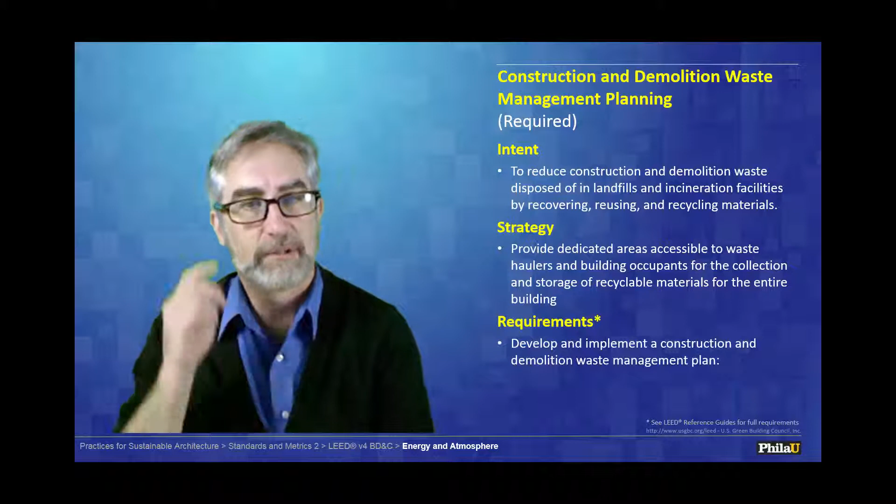Now everybody is doing construction waste recycling, and we found that there's money to be made here. It's not just about saving the environment; all of those materials that are thrown out on site actually have financial value. And so what you want to do here is work with your haulers and work with your subcontractors to implement and develop a system by which people can effectively recycle on site. Multiple languages as a strategy, by the way, is very useful. And these plans need to, of course, be followed up with performance that we'll talk about later.

This is one of the most exciting parts of the new LEED V4 for me, I think, and it shows that the people at USGBC and GBCI listen. And so the intent here, of course, is to encourage adaptive reuse. Why build new when we have lots of empty structures here in the world? Why not just renovate and restore and capture that embodied energy? So the strategy here is close that loop, to try to have closed loop systems where we're not having lots of energy flying out into the environment.

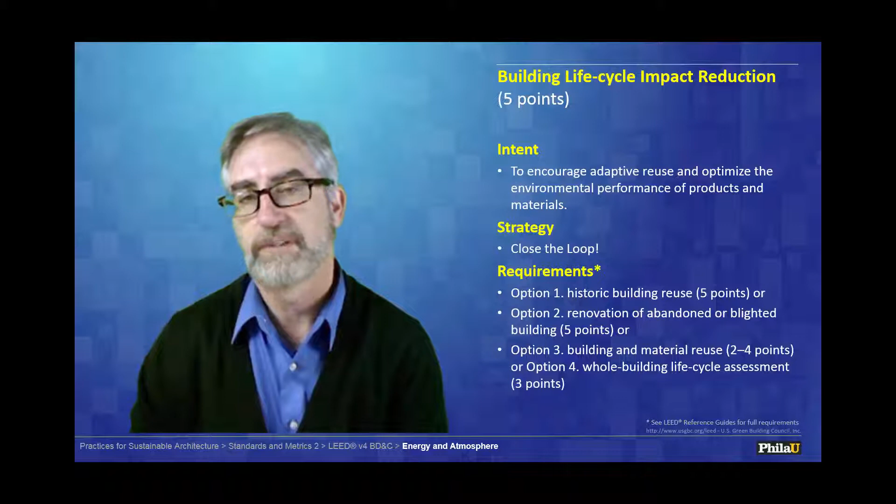And so, for example, here, 5 points for historic building reuse. I think this is just phenomenal because it hits not only the quantitative, but it starts to understand the qualitative aspects of a historic structure having value, having intrinsic cultural value. And so LEED is beginning to acknowledge that. We can also renovate abandoned or blighted structures, and we can also look at saving parts of buildings. And so what LEED has done in version 4 is really evolve the whole materials and resources category to be more responsive to what's actually happening out in the marketplace.

And then the other big thing that's happening is LEED, along with Living Building Challenge and other systems, is driving accountability in product manufacturers and making them become more transparent, more open source, having them report. So the trick there, though, of course, is it takes a lot of time on the sustainable designer's part to get with those companies to have them report out through their declarations. It is extremely time consuming. The only upside, of course, is that once you've got the information, you have it for future products, for future projects. So that's pretty important.

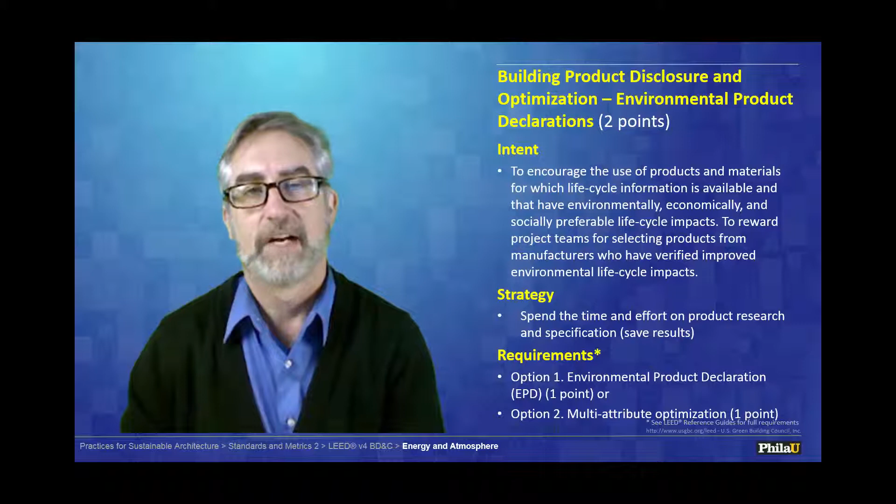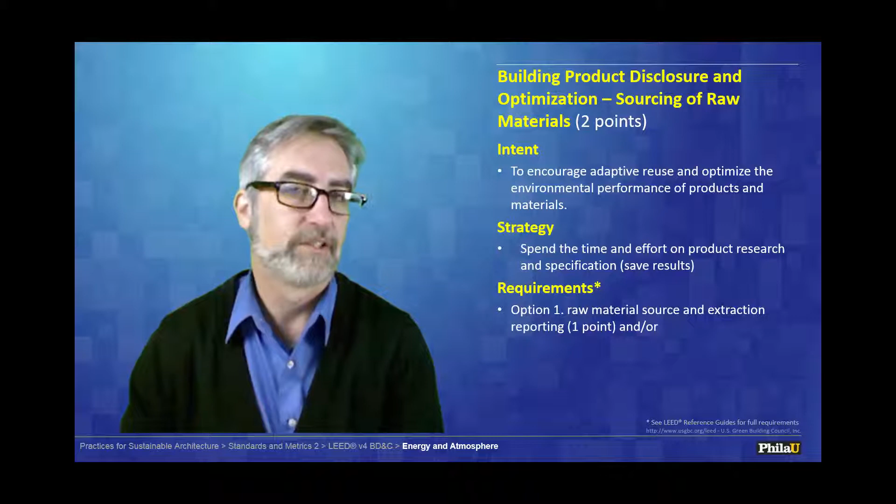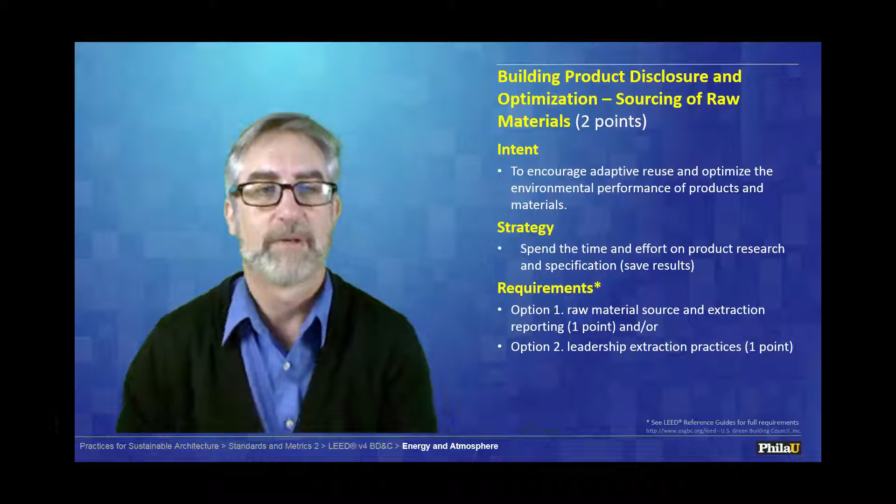So here we have what's called an EPD, which is an environmental product declaration, a sheet which essentially acknowledges what's in those products. Pretty powerful stuff. Again, I really encourage you to look at the reference guide to get a better understanding of that. Now we have the building product disclosure and optimization, and here we're looking again at adaptive reuse. We're trying to understand, for example, how we're using our raw materials. How are we extracting those raw materials, and how is that sourced and or reported? So if you're using rainforest lumber, for example, where is that coming from? How is it extracted? What's the standard there?

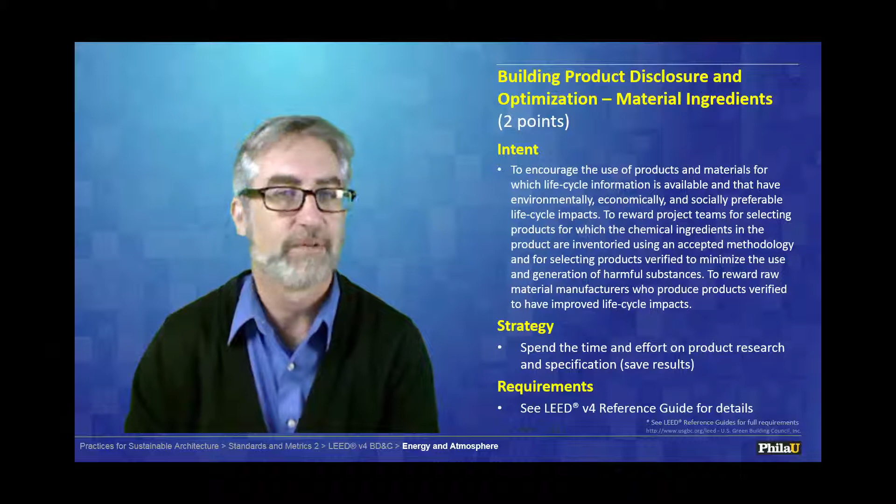And then we're looking at material ingredients. So this goes pretty far. I'm not even going to read all this, but I think you get the idea that what's happening in our industry right now, and it's really powerful, is that large multi-billion-dollar material manufacturing companies are being pressured now to disclose what's going on inside their products, processes, strategies, and all of that. And all I will say here is that it's time-consuming, having worked in a firm that is trying to work through this. Over time, though, this will get a lot easier. So those people out in front are paying the big price.

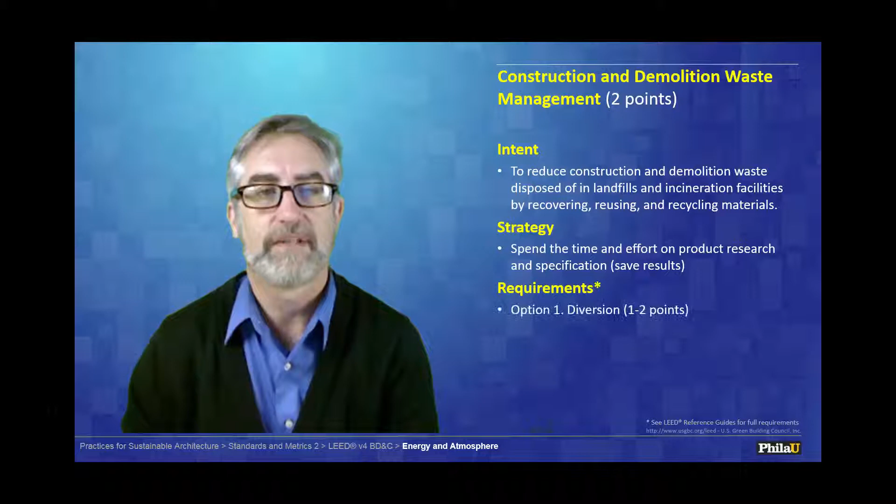Now, we talked about construction waste recycling and how important that was. Now LEED is going to give you 2 points for that: divert 50% and 3 material streams, or 75% and 4 material streams, or just an overall reduction. And there's lots of subcontractors out there right now that will not only take away all your waste, but give you all the measurements that you need. And actually, all the big guys do this now.

So 10 years ago, this wasn't easy to do. In fact, people laughed when we used to teach this as a strategy for sustainability. And now it's actually second nature. I'm not sure about other countries, but here, it's pretty normal. I know companies and projects that are getting 99% construction waste recycling on a project. So it's pretty darned amazing.

And that ends our look at the point-by-points on materials and resources. Next, we're going to look at indoor environmental quality. And as always, I ask you to go and take a look at the LEED V4 for Building Design and Construction for the actual specifics of what I'm talking about.